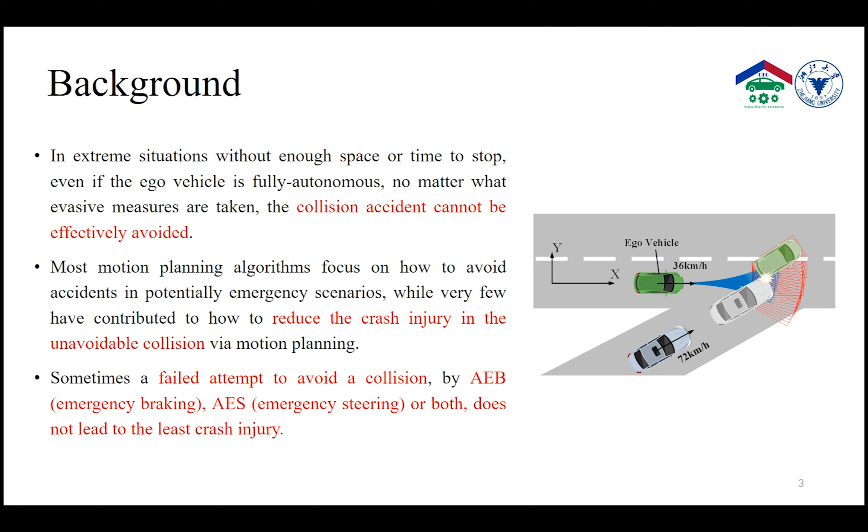Most motion planning algorithms focus on how to avoid accidents in potentially emergency scenarios, while very few have contributed to how to reduce the crash injury in the unavoidable collision via motion planning. Sometimes a failed attempt to avoid a collision by AEB, AES, or both does not lead to the least crash injury. Therefore, we are motivated to find a new algorithm that can mitigate the crash severity to the minimum level when the crash will be unavoidable.

Existing algorithms that consider crash severity level can be mainly divided into two categories: the crash avoidance algorithm and the crash mitigation algorithm. Crash avoidance algorithms that take crash severity level into consideration have the advantage of minimizing the loss of the generated path, but do not consider the unavoidable crash. Crash mitigation algorithms that include the unavoidable crash in their structure improve the planning performance in different scenarios. But the crash severity index estimation model only considers the kinematics change of an accident and ignores the forces.

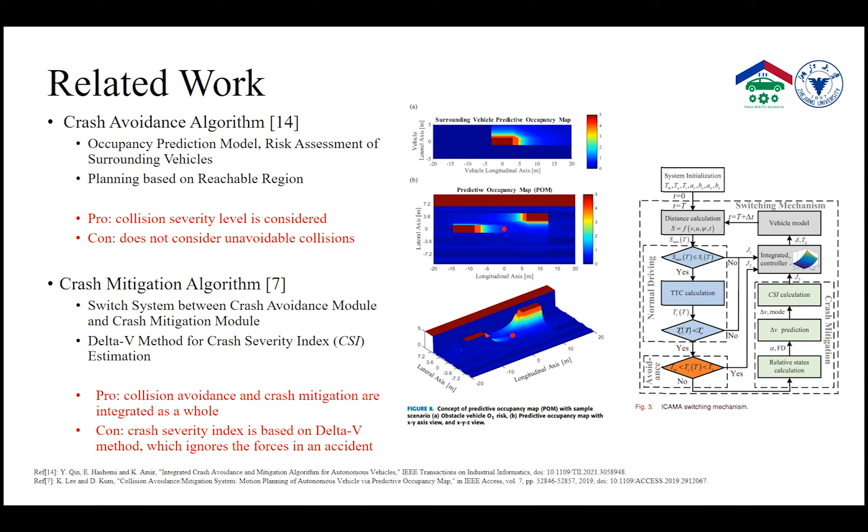Secondly, I will introduce the algorithm structure of our research. The structure of our proposed algorithm contains several parts. Reachable trajectories of the ego vehicle are sampled. With the motion prediction of other vehicles, the possible crash is detected. If the collision is unavoidable, the crash severity index of each sampled trajectory is calculated, and the trajectory with the lowest CSI is selected as the optimal trajectory for crash mitigation.

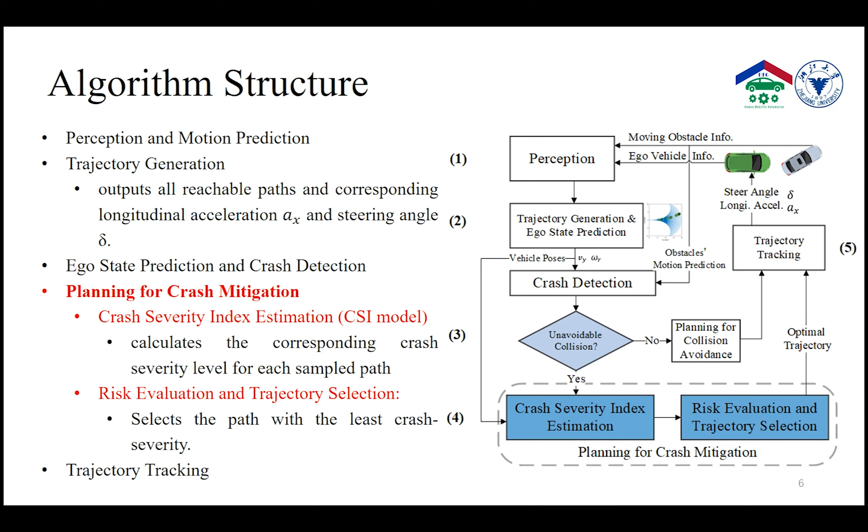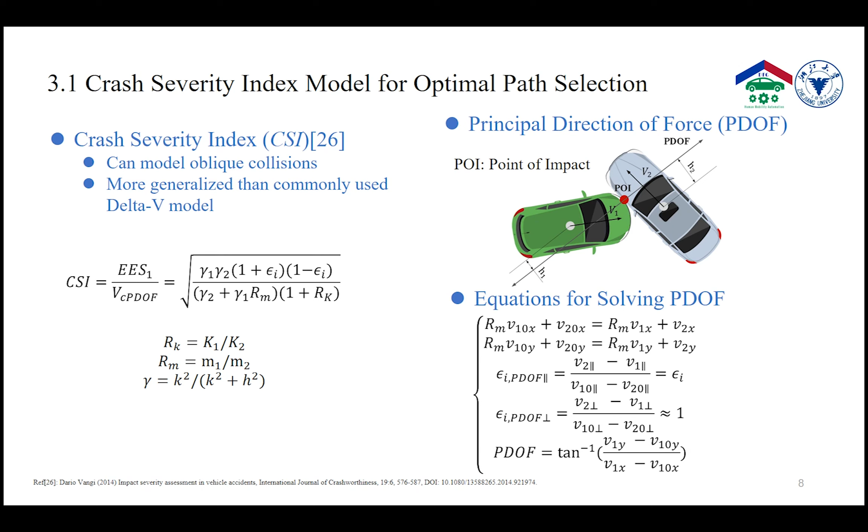Thirdly, I will give a brief introduction of our planning by considering crash severity. To find the optimal trajectory, the crash severity index CSI is chosen as the objective, which is related to the state changes of both interacting vehicles. It can model oblique collisions and is more generalized than the commonly used delta V model. The principal direction of force PDOF reflects the collision patterns and thus is the pivot for the calculation of CSI. To determine the PDOF, the equations on the right should be solved, which are related to the momentum change of a collision.

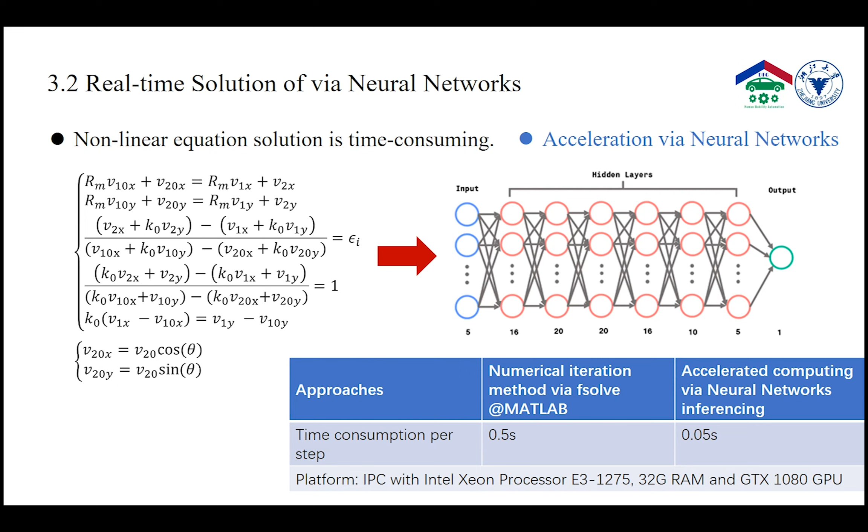After the network is constructed, the CSI can be calculated in real time, and the optimal trajectory with comparatively low risk of collision is chosen. Here we use the clothoid curve to sample the trajectories. For computation efficiency, 41 trajectories are chosen for each given acceleration, with an interval of 1 degree of initial front wheel steering angle. To track the optimal trajectory, Model Predictive Control (MPC) is adopted to minimize the lateral position error and yaw angle error.

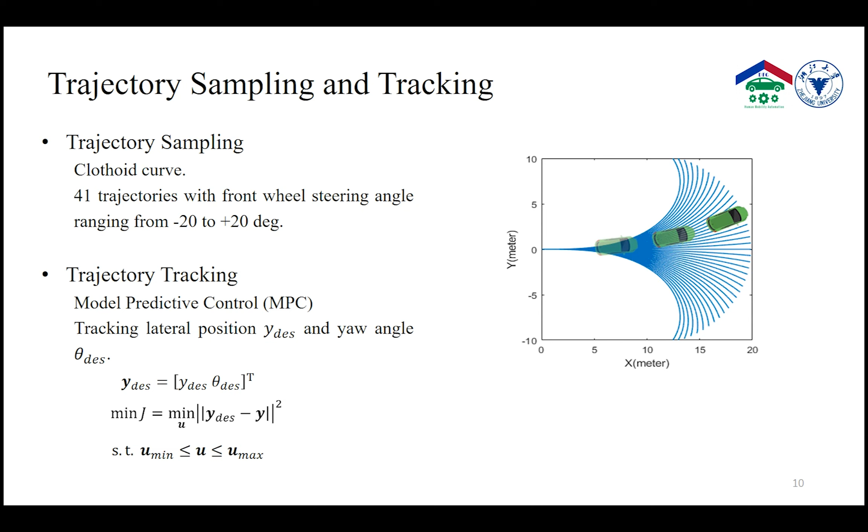To validate the proposed algorithm, we carried out a simulation in MATLAB Simulink. An occluded intersection is chosen as the simulation scenario. The ego vehicle is close to the intersection center, while the objective vehicle is approaching at an extremely high speed. The collision is unavoidable, and the CSIs of different avoidance strategies are compared.

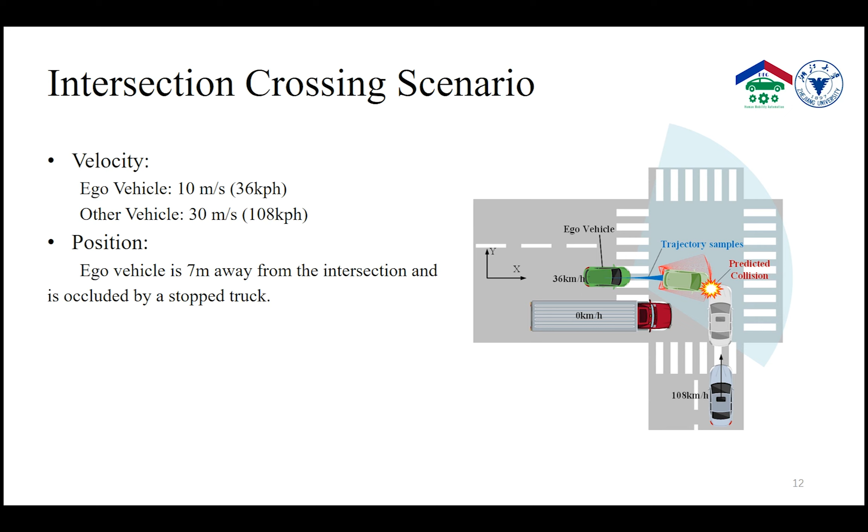If only AEB is activated, there will still be a side impact collision, but the estimated CSI is lowered to 0.151. This indicates the AES-only strategy may work well in avoiding a collision, but is risky in mitigating the crash severity for an unavoidable collision. If using combined braking and steering, the crash severity index can be further lowered to 0.142, meaning that integrated AES and AEB functions can greatly reduce the collision injury.

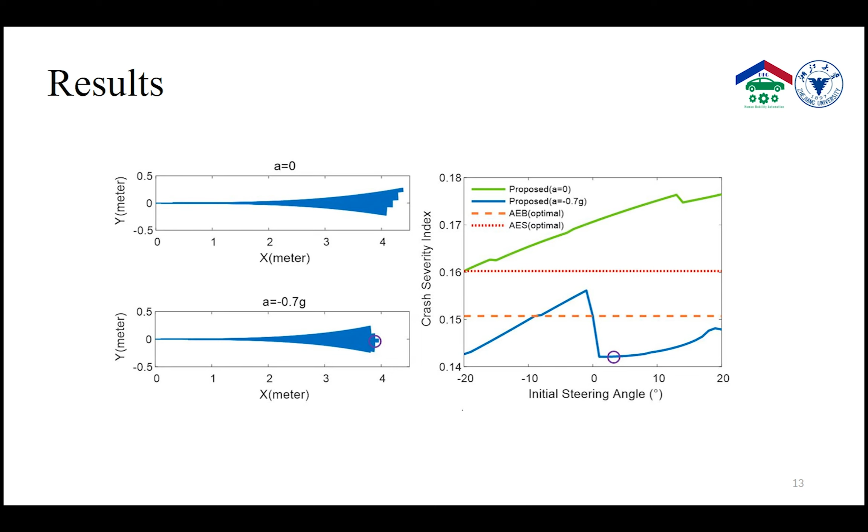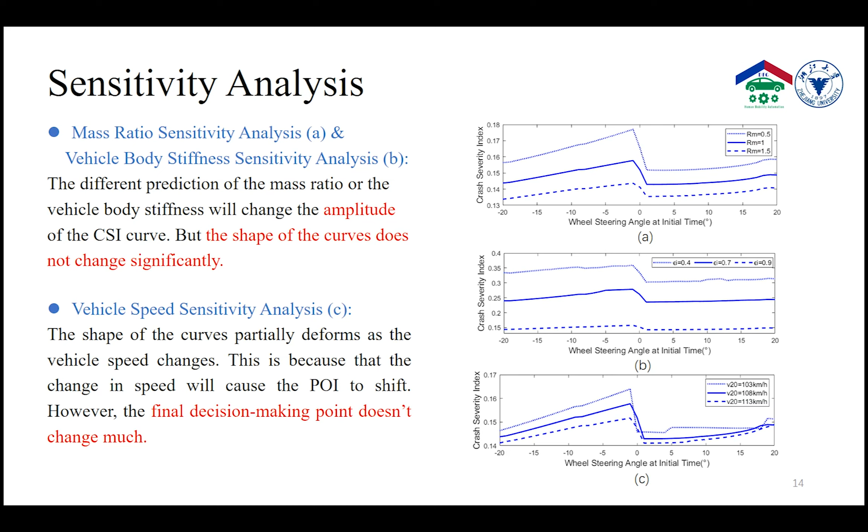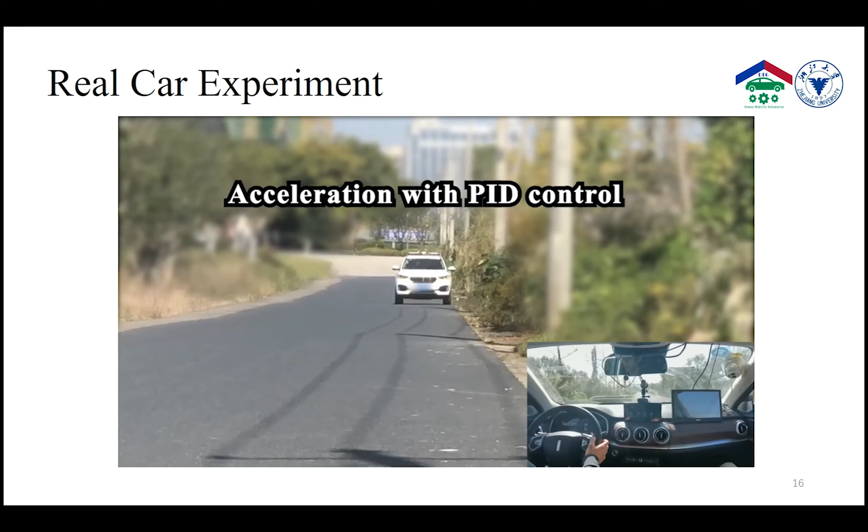We also deployed a real car experiment to test the real-time performance of the algorithm and the trackability of the trajectories generated. The same occluded intersection scenario is chosen as in the simulation. For the sake of safety, the obstacle vehicle only occurs in the virtual world. The ego vehicle first accelerates to the target speed.

Finally, I will make a brief conclusion. The main contributions of our research are as follows. First, we propose an algorithm to handle crash mitigation in the case of unavoidable collision, which includes a generalized crash severity index model suitable for various collision patterns. Second, simulations show that by considering crash severity, our planning algorithm can achieve better crash mitigation performance than current collision avoidance-oriented algorithms.

Finally, real vehicle experiment and sensitivity analysis demonstrate the proposed algorithm can be deployed in real time and provide reliable and safe performance under conditions with model uncertainties. Therefore, our proposed crash mitigation algorithm can be promisingly applied in emergency driving scenarios.